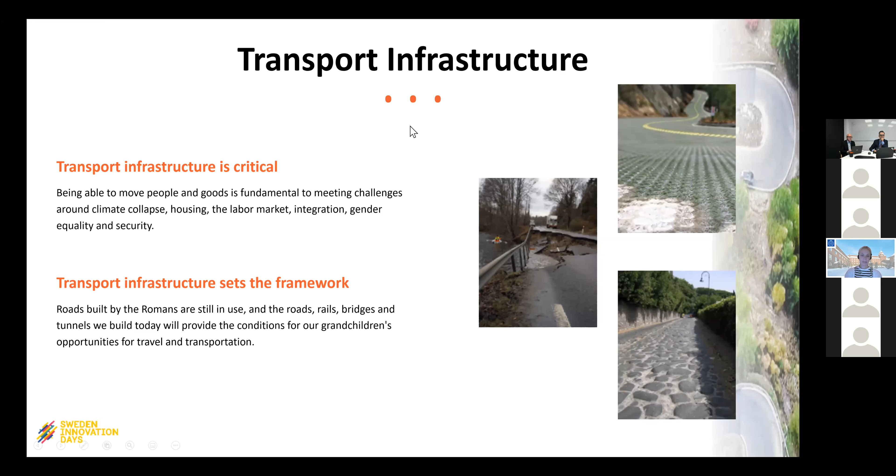What we want to achieve in this program is to maintain an innovative sector that will succeed in reducing the climate impact. We are doing that with construction of solutions for new methods for planning and building. But we also have lots of projects dealing with condition assessment and maintenance.

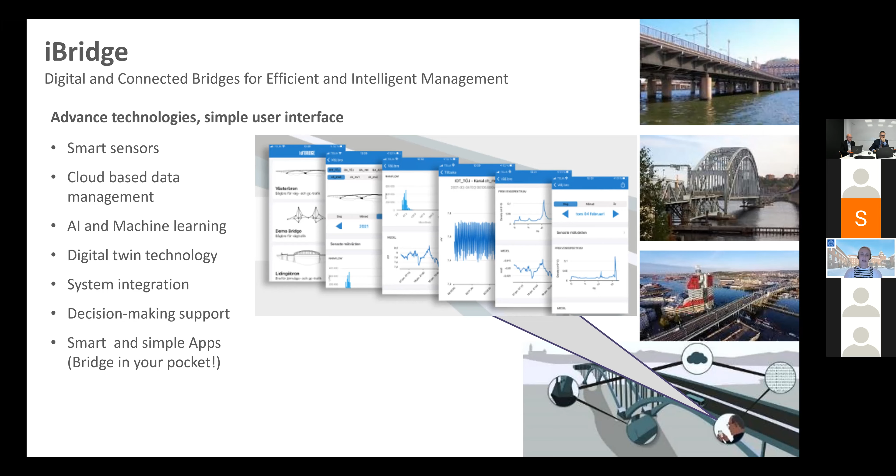Another project is called Wavebreaker, and it has to do with noise dampening effects, so we can build closer to railways and roads and so on.

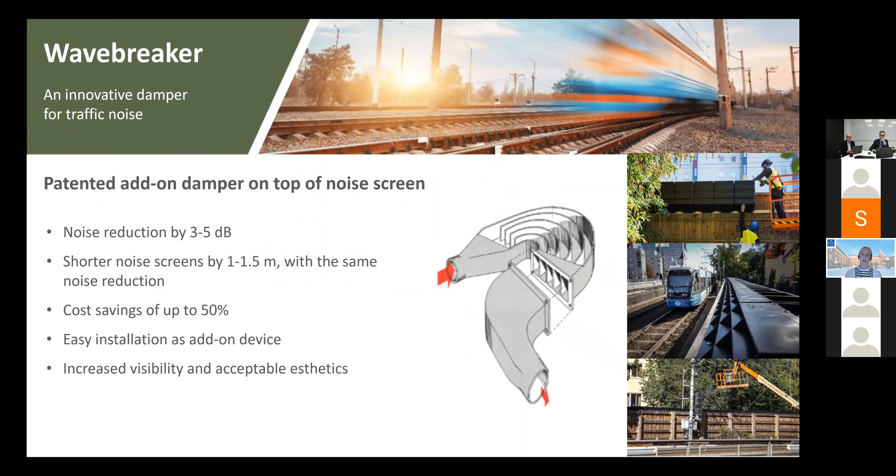And we also have projects on the building phase, for example automated construction. The purpose is to improve the construction sector and also be able to work with industrial robots.

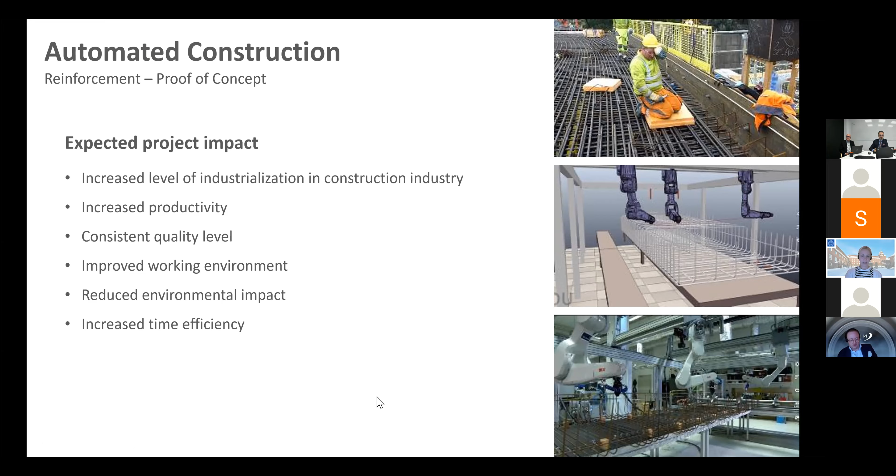Next project you will hear more about, dynamic forecast controlled winter road maintenance, so I skipped that, just a teaser.

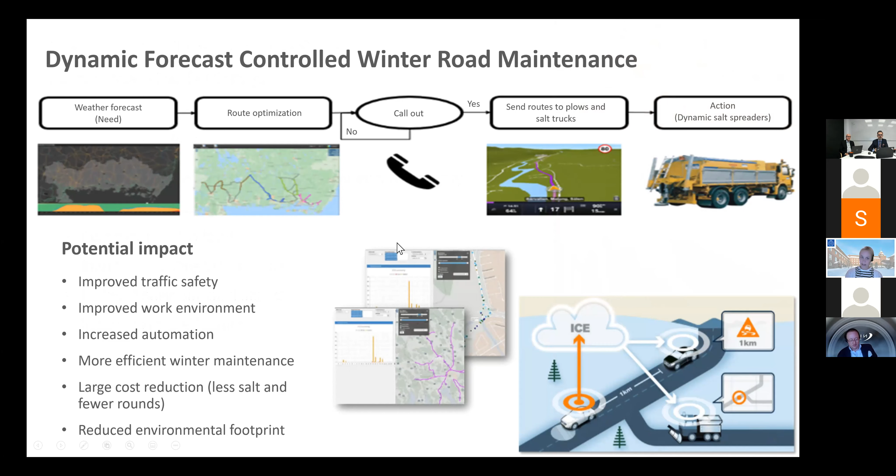And in the tunnel project TACK, we investigate how new technique can detect cracks on tunnel lining in order to find out where to repair it faster and easier.

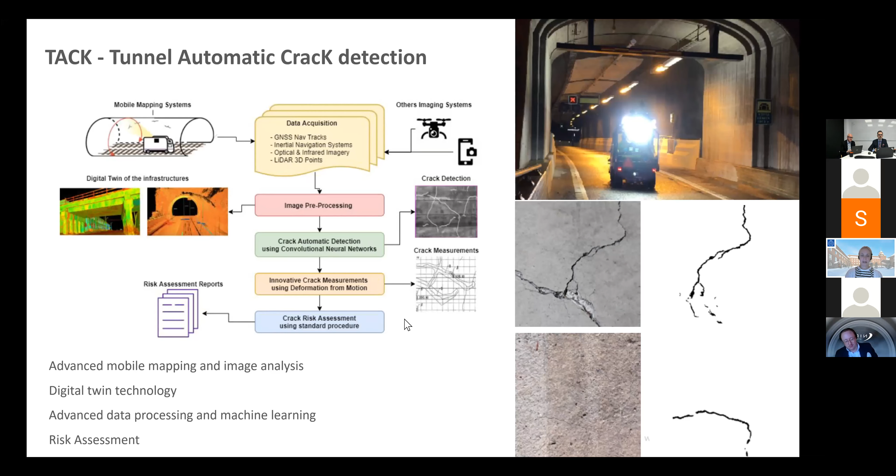And in the project Smart Cement, we search for the ideal solution for monitoring concrete structures and to develop a conductive concrete with self-monitoring capability. This smart concrete can then be used for entire structures, or it can also be used in old structures to repair, and it's at the moment tested in a pilot.

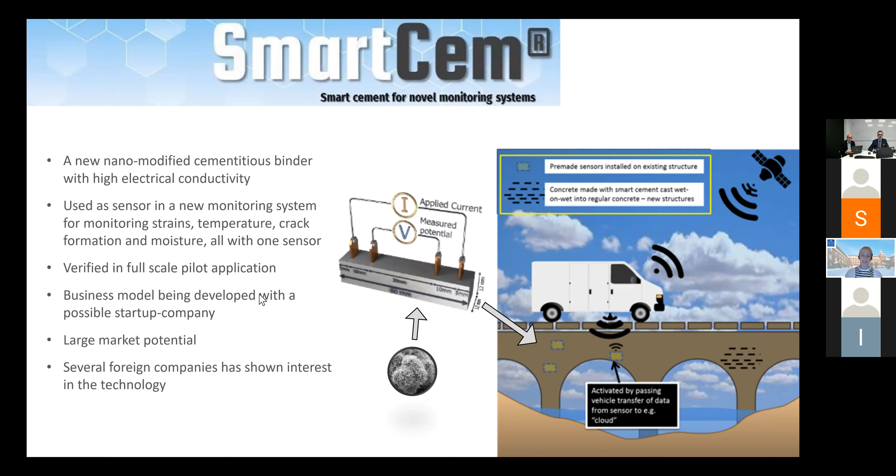So we do have many projects and many interesting and inspiring results, but that's all for this introduction. So thank you very much.

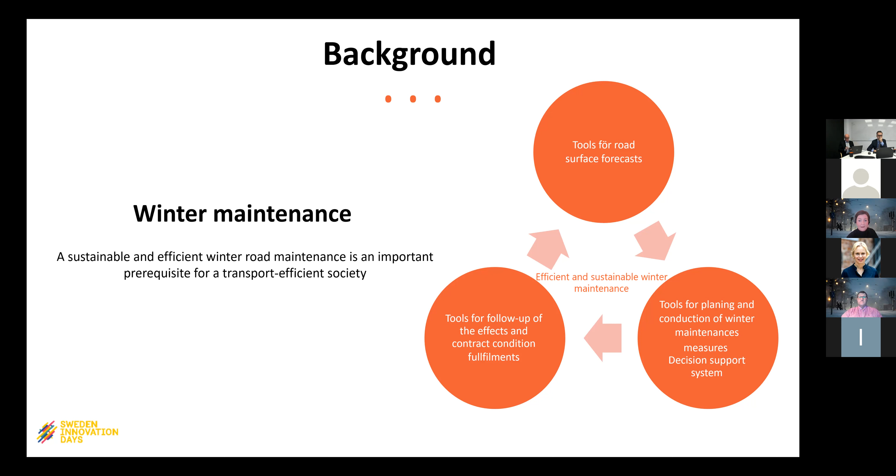With this said, how does it work in reality? We will talk more about that in the coming slides.

Today's winter road maintenance: we have road operators in the city responsible for approximately 3,000 kilometers of road network, which consists of roads, cycle paths, sidewalks, and other surfaces. During wintertime, high demands are placed on winter road maintenance from both citizens and visitors. We do what we can to ensure that the municipal roads are passable and safe, however we can never guarantee 100% non-slippery roads.

Between October 15th and April 15th, we have our winter organization running, meaning we have people on standby round the clock to ensure that we are always ready if the roads need to be plowed or de-iced. This requires planning all year around, as well as a lot of resources and cost. About one third of the winter cost is personnel, equipment, and drivers' expenses.

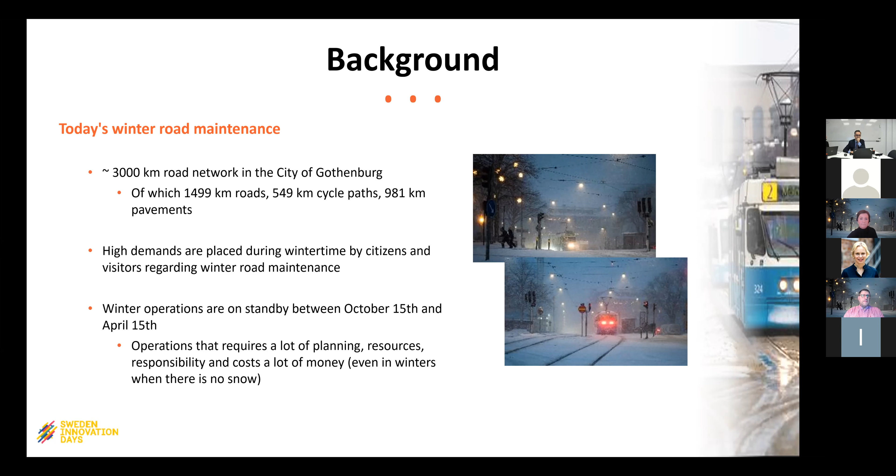During our winter period, we also have continuous follow-up of the forecast data via weather stations. Monitoring weather data is an important part of winter operations and a crucial tool for decision making. However, the weather data is only collected from a few weather stations around the city, meaning the information is not representative of the entire road network. Also, the stations are deliberately located in places that are climate exposed to capture high-risk areas. This means that winter road maintenance is often based on a worst-case scenario.

We also have a start criteria, which must be met for an action to be started. Today the criteria for plowing is 2 to 3 centimeters on the main streets and 5 centimeters on the local streets, and this criteria is also very dependent on weather and time.

The climate in Gothenburg is very humid because of its closeness to the Atlantic, and we also have large altitude differences in the city. This means we sometimes can have 10 degrees below zero in the eastern parts of the city and plus degrees by the sea. This affects the road conditions extremely and makes them difficult to assess. It also means we sometimes have to plow or de-ice in certain parts of the city, while in other parts no action has to be taken.

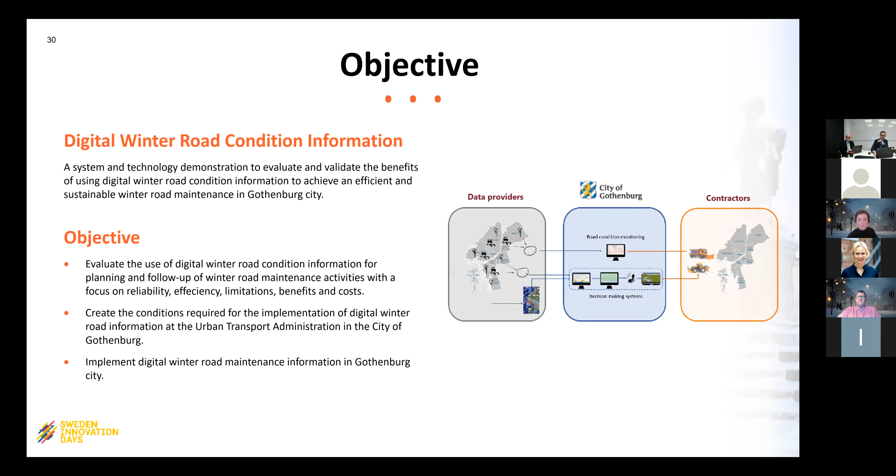So, short about the project, the objectives, and how the system looks. Here is a picture explaining the ecosystem of digital winter road condition information - a combination of stationary sensors and mobile sensors used to collect data about the road condition or road surface condition.

This data will then be combined with weather forecasts to create high resolution road condition forecasts, or road surface condition forecasts. This information will then be used as an input in a decision-making system.

To find out what kind of action has to be taken, where, and when. This information is then sent to the contractors to take the right measure, the right action, in the right place at the right time.

And when these measures are conducted, the information will be sent by the contractor to the Urban Transport Administration at the city of Gothenburg, to give them more information about the actions and a picture of the current condition.

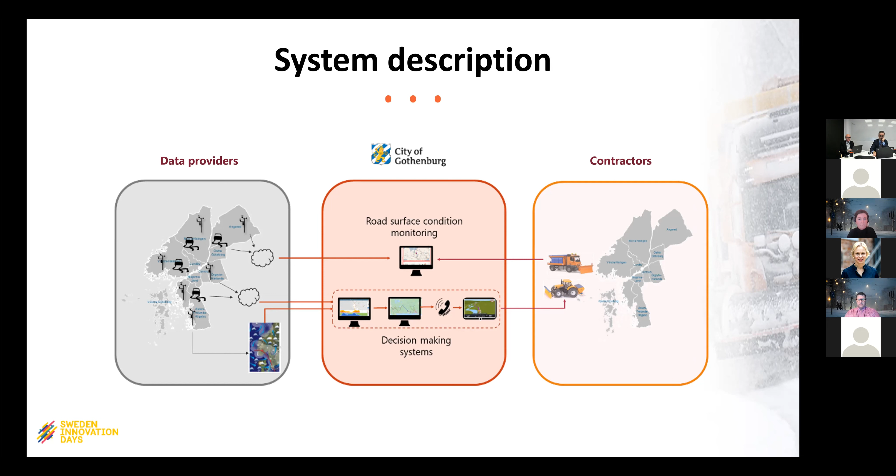And one of the necessary inputs to this new winter maintenance approach is the high resolution road condition forecasts. One of those applications used for this reason is provided by Klimator AB, and I would like to ask Tobias Nordgren to give us more information about the application. Tobias is a director of international partner at Klimator with 17 years experience working with digital transformation in different domains.

So over to you, Tobias, please. Thank you, Hashim. I would like to see if I can share my screen. Make sure that it works okay. Great. Okay, hi everyone, my name is Tobias Nordgren, and as Hashim said, I work at a company named Klimator.

Klimator's part in Gothenburg's digital winter project is focused on the road condition forecast, which is a necessity for the maintenance organizations to be able to plan their actions and organization for what's to come. This will just be a short 10-minute crash course on road condition forecasting. I will explain a little bit about Klimator's background, some basics in road climatology, show what is needed to make a world-leading road condition forecast, and also explain how that is transforming the businesses around us.

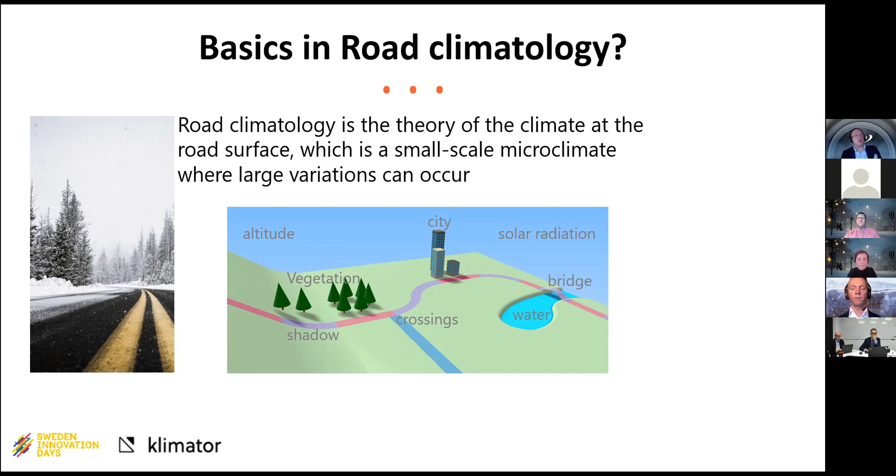Road climatology is about what happens on the road surface in a specific area, like on the winter road picture to the left. The road climate for the road stretch depends on several parameters, such as topography, weather, and solar radiation. All these parameters on unique road segments are categorized. Imagine your country's national road network, thousands and thousands of kilometers of road, divided into small segments, combined with 30 years of climate data for each unique road stretch. Then you have the first piece of the puzzle to make a road condition forecast.

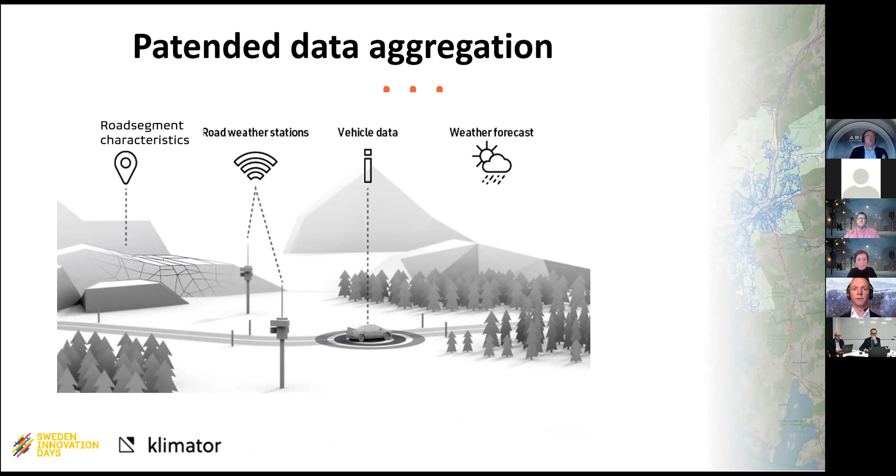The next piece of the puzzle is to combine road segment characteristics with multiple other data sources, such as road weather stations, vehicle data, weather forecasts, and other relevant sensors. All this data is combined into rule-based models, which are based on Klimator's research in road climatology, models that have been developed and validated over a long period of time. We add machine learning to do the validation of our data sources and continuously support us in improving the climate models. For example, before setting up a new road network where we want to make forecasts, we validate our models within this specific area with years and years of historic data before launch to the customer. This results in a world-leading road status forecast up to 72 hours, telling you what will be on the road surface on that specific road segment with high confidence.

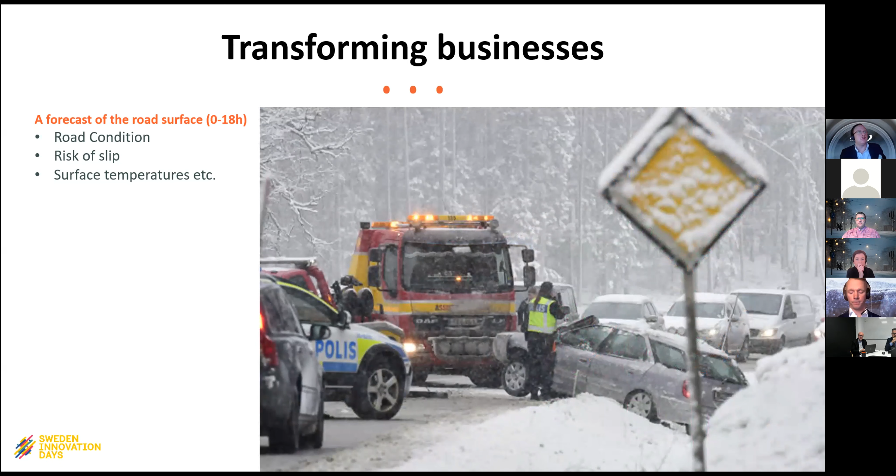Right now, there are a lot of changes going on within this industry that define a big transformation. There are precise road weather forecasts that save resources, such as the usage of salt, diesel, and vehicle hours. Less resources used means reducing the environmental impact and contributes to the environmental goals. New business models are launched between road authorities and contractors. Technology development focuses on dynamic salting, dynamic routing, and even further down the road, autonomous maintenance vehicles.

This is why Klimator is so engaged to continue to invest in research and customer dialogues. We are only in the beginning of a huge transformation. But in the end of the day, we are all here to create safer roads, limit the impact on the environment, and contribute to a sustainable world. And this is the end of my presentation, and I thank you for your attention.

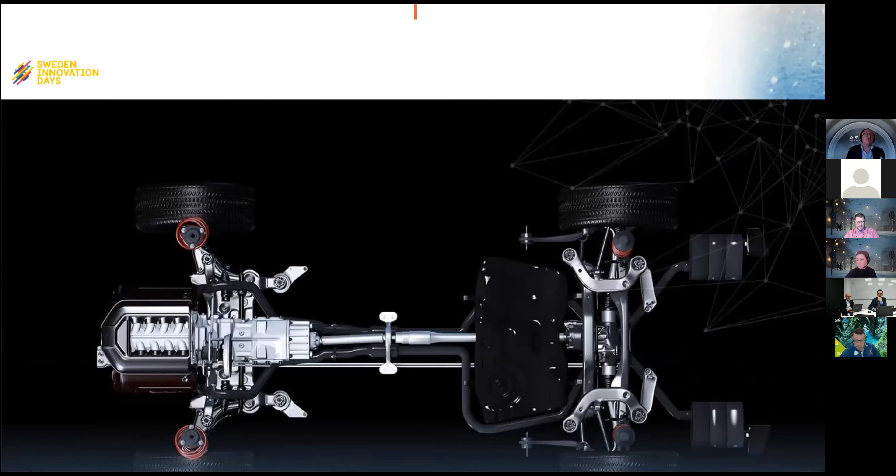So NIRA Dynamics, the core foundation of the company is to only do software. We have some hardware internally to do analysis and to collect data and so on, but the products that we deliver to our customers is software based. And our core concept is to use only existing sensors. So we don't put any sensors into the vehicles, or put more vehicles onto the road. We use what is there and try to generate additional information, or just capture this information and press it in a usable way.

And especially what we do in the road perception unit is to install these algorithms, which take the current sensors within the vehicles, process that information, and then we send it to our cloud. And within this cloud, we are processing it and visualizing it and packaging it for different customer segments that can be used for different applications.

So this is a brief look at our processing chain. Let me just enable the pointer here. So over here, we have the data collection side.

So we are installed in the Volkswagen Group brands, namely the Volkswagen brand, the Skoda brand, the Seat brand, the Porsche brand, and the Audi brand. We install our algorithms into the core processing units of these vehicles when they are leaving the production plant. So they are installed during series production, and when they roll out and are sold to end customers, these algorithms are active in the vehicle. They start to send data to the vehicle manufacturer backend, and send this information further on to our backend in real time, with a very minimal delay in the data processing pipeline.